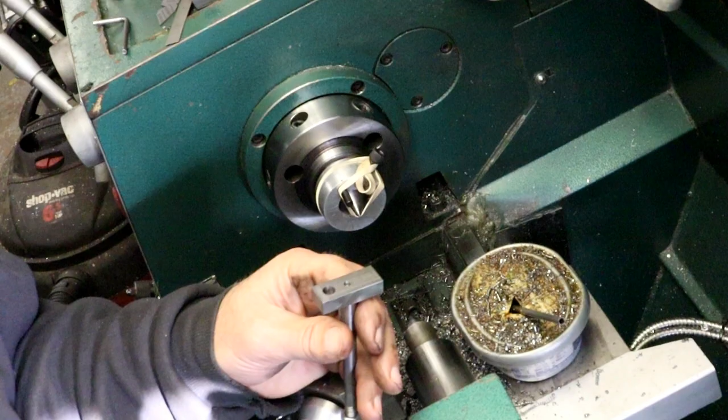All right, I deburred it a little bit. That fits on there nice. Now we got to turn up this pin and put this crank pin in there, and then the crank will be done. So I can tear this down now.

So we're done with between centers, and I'll take this off, which is an Allen wrench. That actually works pretty good. Got copper. I put a copper shim inside so it's not tightening down on it. I'll definitely keep that for later use.

Now to get this out, to get your center out, I just take a long bar. This is just an aluminum bar, so it's not going to mar anything up on the back side. Stick it through the spindle, and give it a rap. They both came out at the same time.

A lot of times, if you're careful, it'll just knock the center out first, and then you can knock this out, but it knocked them both out at the same time. Didn't hurt anything.

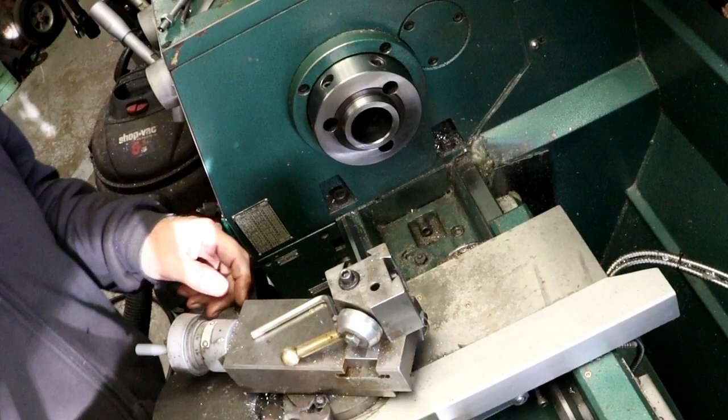I see a lot of people put them 90 degrees like that. I don't like that either. I don't like it. Well, at 45, I can understand why they would do that. If you want to take half a thou or whatever, you can get away with doing that, but I like to keep mine at 29.5.

Right there. So it's ready for threading. Tighten them up. There we go.

Take this. I'm going to take that off and give it a little bit of a blow and blow the stuffings out of it. That's got a few little bits. Wipe that off so we don't have nothing underneath so it rocks. Can't have that.

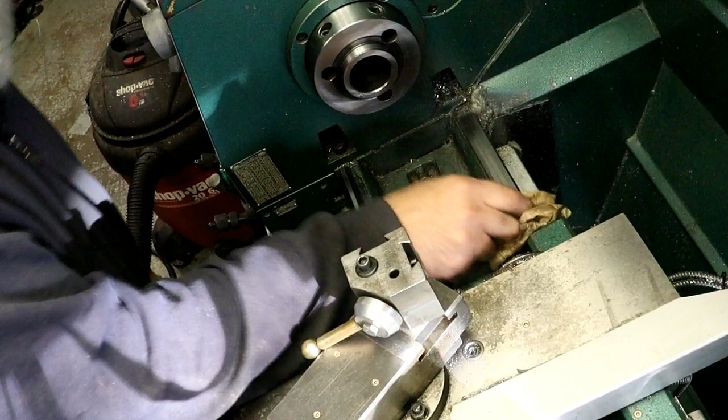Let's crank this all the way down and then give it a good oiling. Oiling and cleaning.

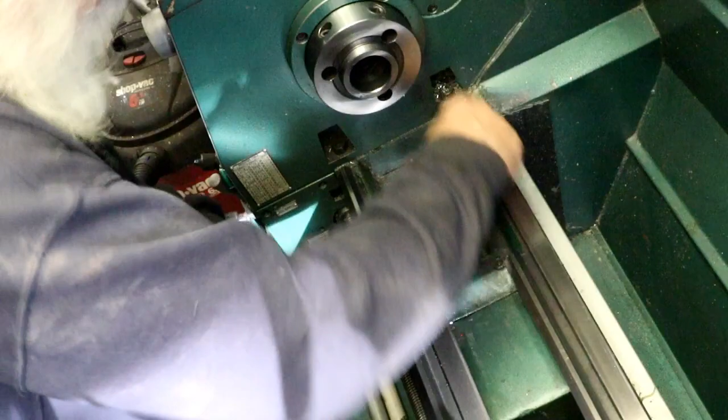Okay, way lube. Crank it down.

There we go. Now let's clean. Let's clean for the tailstock. Slide that up there. Wipe this down in the back. Put a little way lube on that.

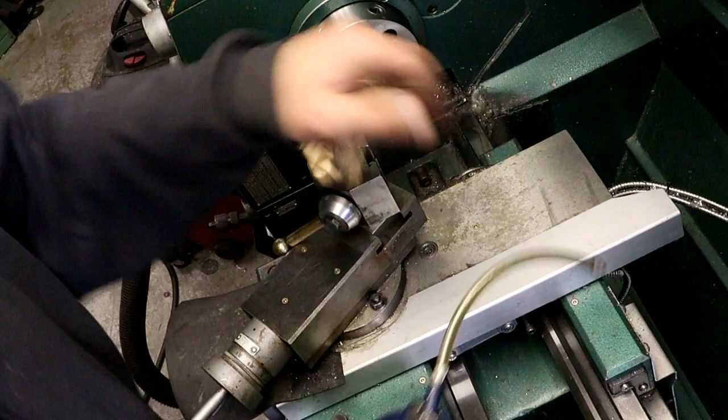Slide her over. And I do have a can here to do the ball oiler fittings, right here. And give that a shot. So it gets some oil in underneath. There.

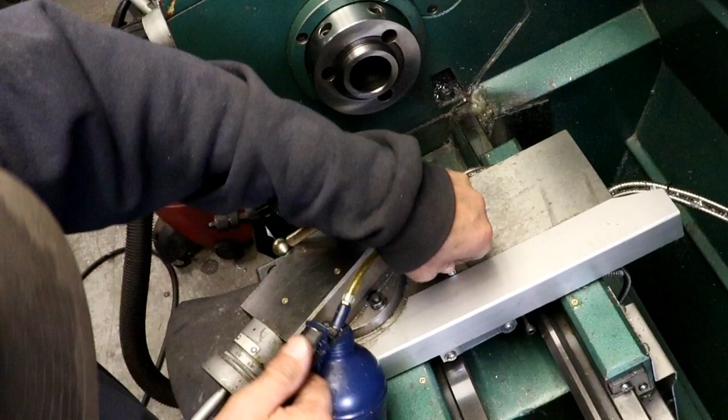There. And this one right up here, real close. I got one right up next to my shield. That puts it in underneath the slide, and then another one right here. And then this one.

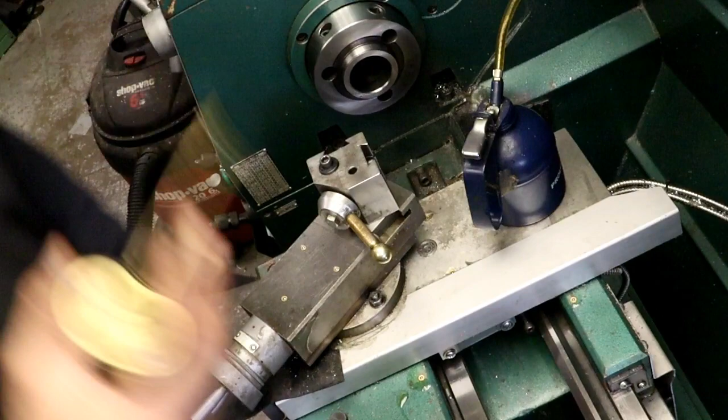Okay. And we got these. I didn't even use this, the compound, but we'll try to get some oil in them anyway. These up here at the top are a little bit buggered. It's like maybe they need a smaller one. They do look a little different. This one here is a smaller one. Yeah, that works better.

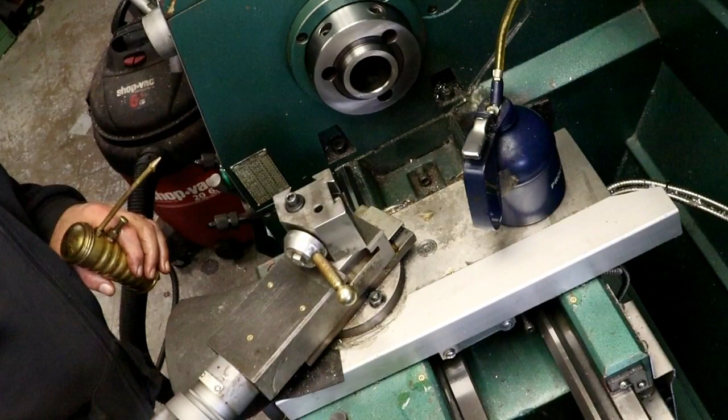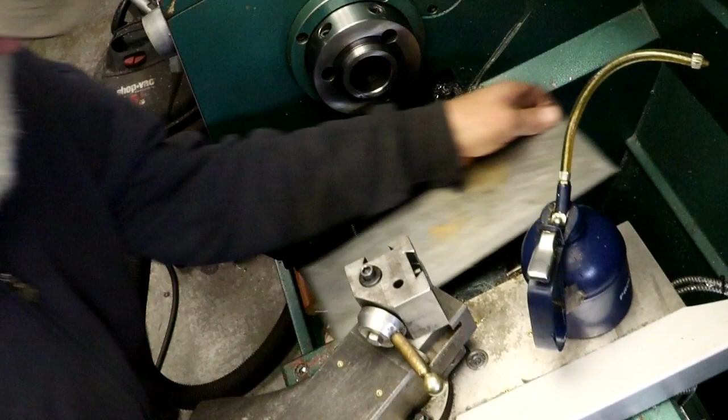Let's crank it out once and... I should probably have done that first, cranked it out, and then I run with it all the way locked, pushed up to the front. That's the way I run. And I got a little shield here that keeps some of the chips off of the ways when I'm turning right up here.

Okay, you watched me clean up the lathe.

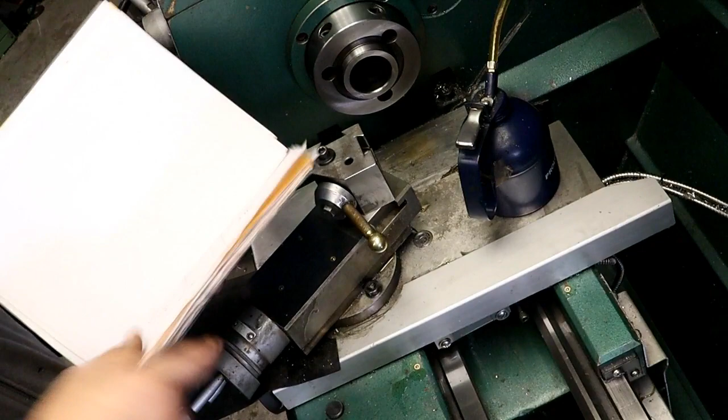We need to figure out what pin size. I gotta find that drawing in here, in this package of drawings. Pretty sure it's in here.

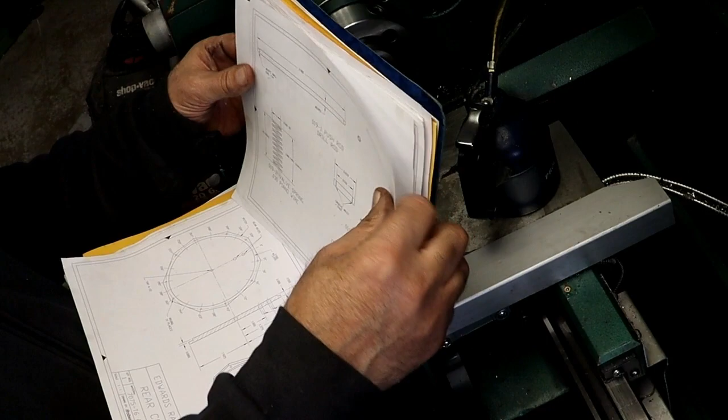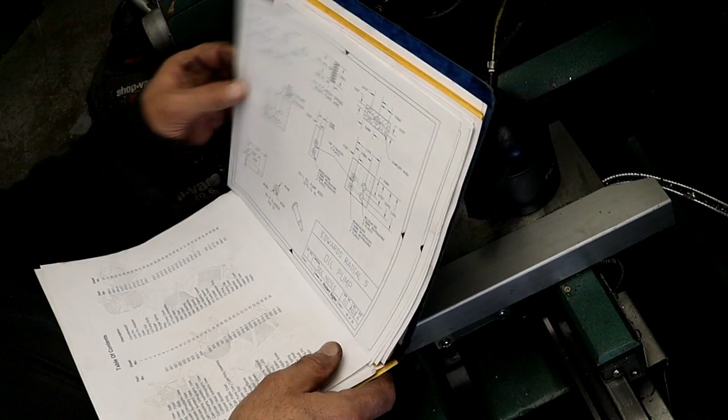Rocker arm pin, we made those. I think those are all the things we made except for the crank. Rocker shaft. Oil pump. There we go. Crank pin. So it's .313 in diameter.

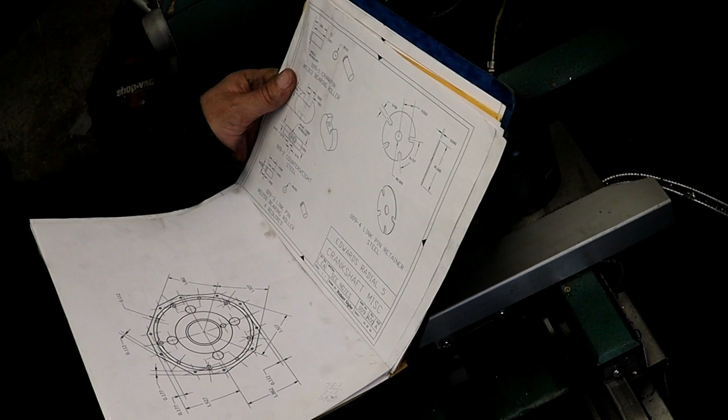And what did they call out? See, yeah, they're calling 2 thou press. Wow, that's quite the press on there. I'm gonna go for .312. And in a groove, 1 inch, and it's 1 inch long.

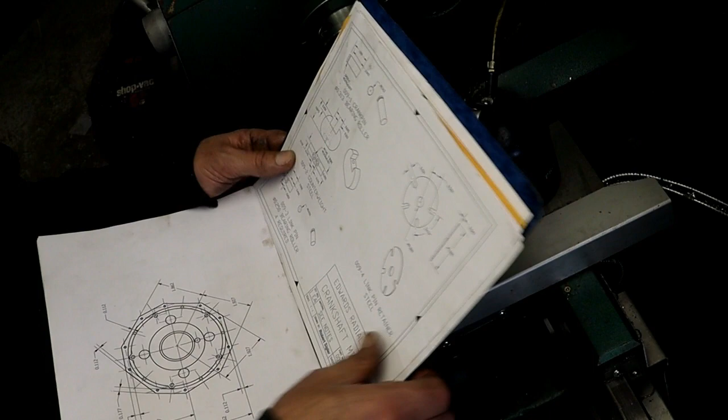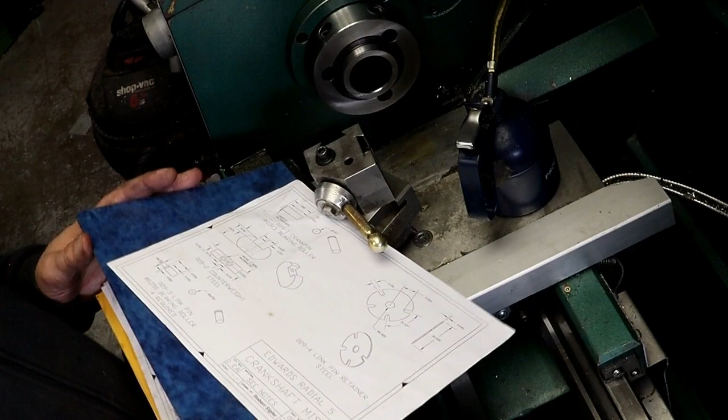All right, take that out. Put this dirty one away that we finished. Now this is basically done, except for the 10 thou washer, shim washer, which I'll stamp out of some shim stock. And this bearing goes on here, and I have to find another one more bearing for this.

Slides snug right up against there. I think the seals have to be pulled out of them, otherwise they're not going to get any oil. So we'll have to pull those seals out. That's no big deal. Pull the seals out and probably remove the grease even, because the oil will get in there. Alright, I'm going to lay this over on the bench, or on the surface plate, because it's a part that's done, except for the pin that goes in there that we're going to make next.

Put this up. Oh, actually I missed some here. We got an oil inlet down here, and an oil inlet down here.

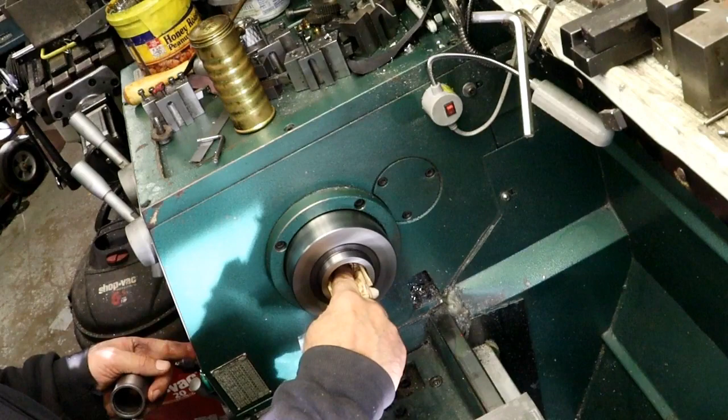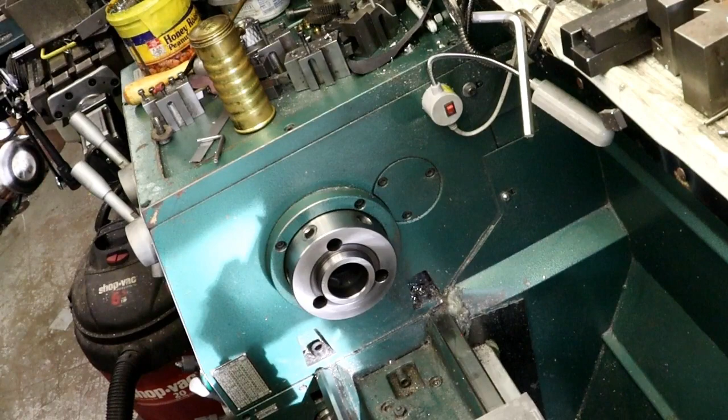And I'll give it a little bit of... you want to make sure that's clean in there, and you want to make sure this is clean with no oil on it.

And put that there, give it a smack, put my feeds in neutral again, grab the tube, stick that in the back here. The tube is what screws on the back of the collet and pulls it. It's the handle. This handle just flips down and around.

And gotta get the Allen wrench here. It doesn't take that long to flip from chuck to 5C collet. Probably what, 3 minutes, 2-3 minutes. Doesn't take that long. If you rush yourself, I'll bet you can do it in under a minute.

Alright. Tighten up the lock nuts. Otherwise, they'll vibrate out for sure. It's got 2 half-dowel pins to fit in to make that handle work.

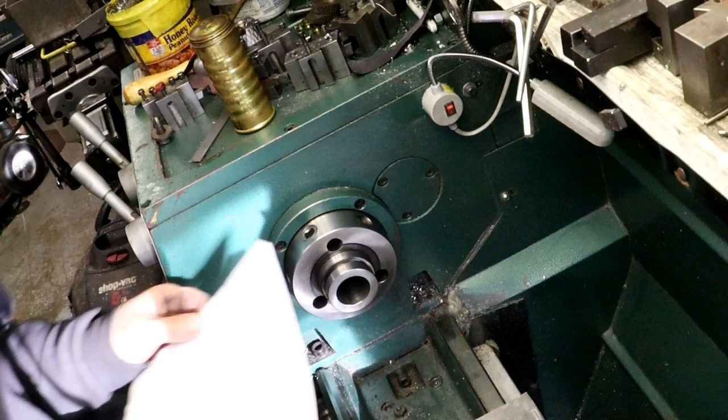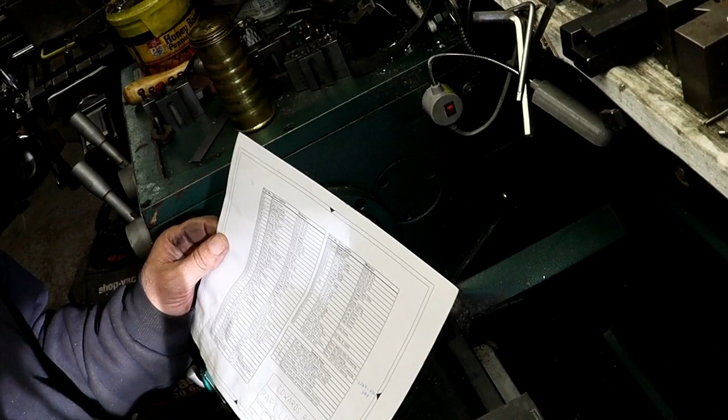And now, probably want to use, I don't know. It says material, see notes. Okay, I'll see notes. Parts list and notes. I want crank pin, crank case, cam housing, cylinder barrels, cam follower, crank shaft, crank pin, dowel pin. See, that's what they're calling out, is a dowel pin. One-inch long, 5/16 dowel pin.

You'd have to take a carbide to cut that groove in there, snap ring groove. Let's see if I have any dowel pins that are 5/16. That's a 1/4 inchers. I don't think I do.

You know, they're case hardened, so they're kind of tough to turn a groove into them. Yeah, a lot of 1/4 inchers. Nope, no 5/16. So I'm not going to use a 5/16.

I think I'm going to use a piece of stainless. Thought I had some 5/16 stainless. Some small pieces. Yeah, what size is this?

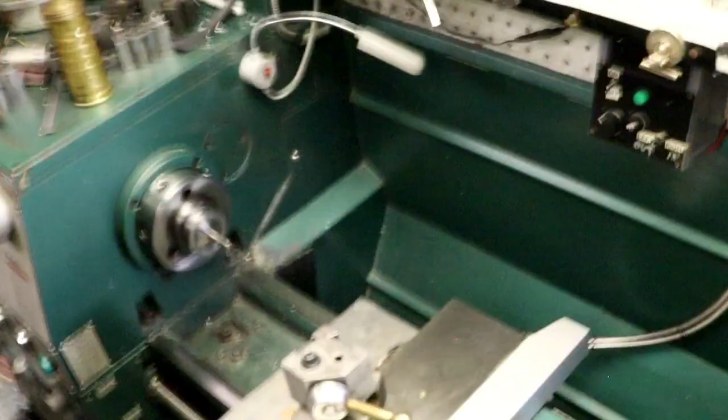Right now I got to move the camera so I can pick the oil bottle up that I knocked down. Oh, it's a long ways down. The older you get, the further it is to the floor. You know that? The distance changes.

Alright. So I want that there. I want that there focused. Damn it, been having trouble with focus again. It seems like if you don't zoom all the way in, stay back a ways, the focus will straighten itself out. Alright, let's face this off up to this snap ring groove that is already there for me.

They had a tool set up for that, I thought. Huh, god darn it, I must have tore it down for something.

No, I don't want that one. Me and oil bottles aren't getting along. I could use this one here.

I'm looking at setting one up and leaving it set up again, because that's what I had. I had one set up just for that, and obviously I tore it down.

This is one of my father-in-law's. Will it fit in here? Some of them have to be, that's fine. It's a little tight, a little snug, but I can turn this tool around, and then I'll leave it set up for that. I'll leave it set up for doing ends, or facing off your material.

I made him a few tools that, oh, I know, this one was set up for it. I tore it down when I did that alternator. That's why there's copper on it. I think I had that set up, and then it... okay.